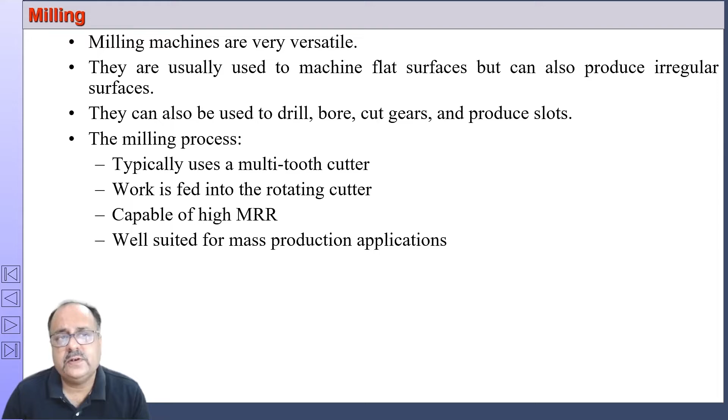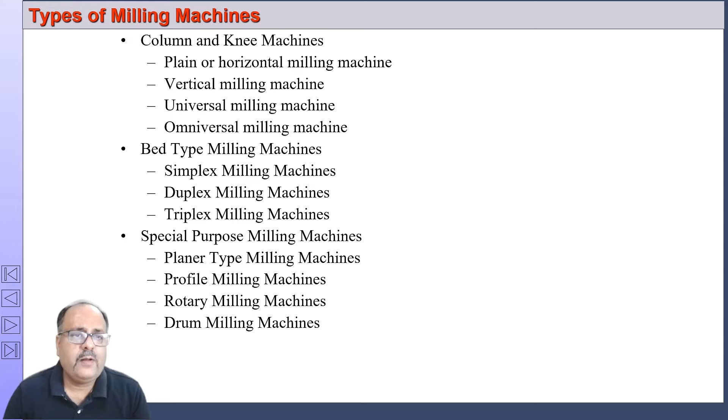So what are the different types of milling machines? They are classified into three basic types: column and knee types, bed types, and special purpose milling machines. Column and knee type milling machines are 4 types. Bed type milling machines can be simplex, duplex, and triplex. Some of the special purpose milling machines which are not that popular are planer milling machines, profile milling machine, rotary milling machine, and drum milling machine. So all these will be discussed.

We'll start with column and knee type milling machines. On the figure on the right hand side is the horizontal column and knee type milling machine. It's a plain milling machine. You can see there is a column and there is a knee, and that's why it's called a column and knee type milling machine.

This knee can move up and down, and there is a saddle on this knee which can move in the crosswise direction, and the table can move in the longitudinal direction. So there are 3 degrees of freedom. This is called a 3-axis milling machine, and this is the spindle.

This spindle holds the arbor, and the arbor rotates carrying the cutter. This is the cutter. So the axis of rotation of the cutter is parallel to the table. That's why it's called a horizontal milling machine.

Whereas here, this also has 3-axis movement. The knee can move up and down, the saddle can move crosswise, and the table can move in longitudinal direction. Here the axis of rotation of the cutter, if this is the cutter, is perpendicular to the table. That's why it is called a vertical milling machine.

It is also a plain milling machine. This is also a plain milling machine. But essentially, when I say plain milling machine, we mean it's a horizontal milling machine.

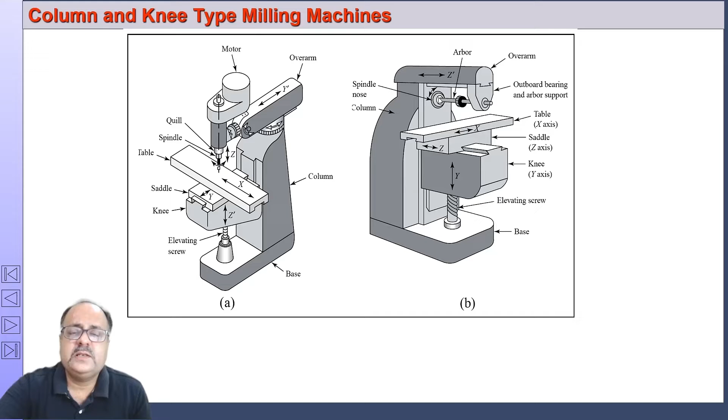So this is a horizontal milling machine. We have two figures in front of you.

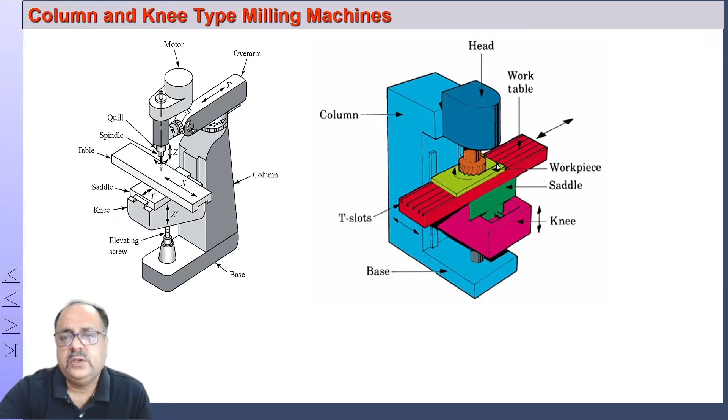This is a vertical milling machine. You can see the cutter rotating. This is a face milling operation going on. The cutter is rotating and a flat surface is being generated.

This is a universal milling machine. You can see apart from this, the knee can move up and down, and this is a saddle here. The saddle can move in crosswise direction, and on top of the saddle there is the table, and this table has a circular base, and it can be rotated about this circular base. You can see the circular base here and it can be fixed at any particular angle.

This is required when you want to take helical cuts, when you want to make helical gears or helical cuts. This type of arrangement is required. This type of arrangement I have shown in our universal milling machine in our lab for making helical gears.

So currently it is cutting gears. You can see this is the dividing head. This is the mandrel which is holding the workpiece, and this is the cutter here which is not visible. It is cutting a helical gear.

So there are 4 degrees of freedom. The universal milling machine has 4 degrees of freedom, or it's called a 4-axis milling machine. It can move up and down, the saddle can move crosswise, the table can move longitudinally, and the table can be swiveled. So 4 degrees of freedom.

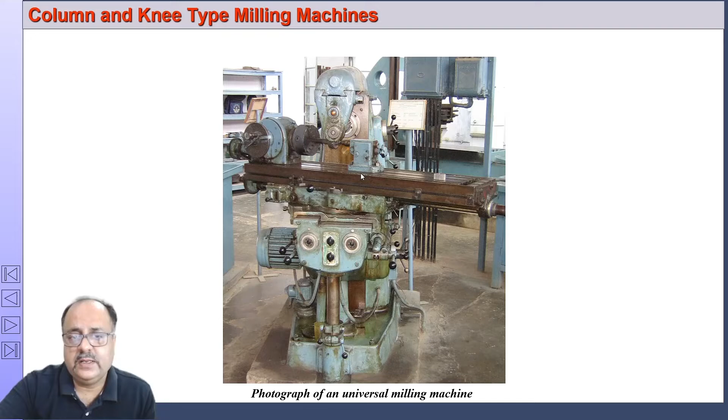And there is another type of milling machine where the table not only can be swiveled like this, it can be tilted also. So it has 5 degrees of freedom. Those types of milling machines are called omniversal milling machines, or 5-axis milling machines.

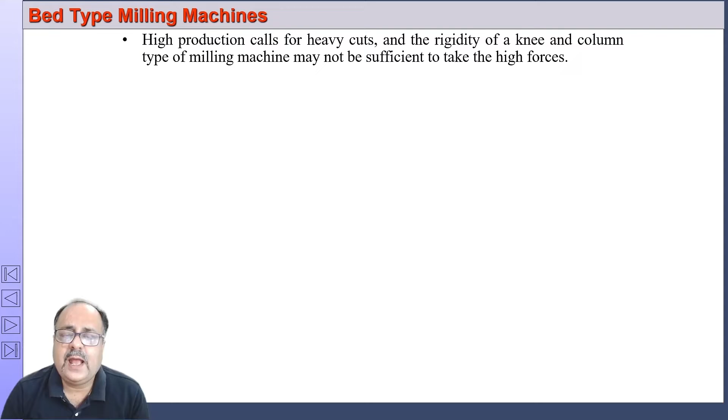Then we have bed type milling machines. Sometimes the work is quite large, not possible to be held in a column and knee type milling machine, and it requires much more rigidity than is available in a column and knee type milling machine. In such cases, we use a bed type milling machine where there is a bed, and on top of the bed the table is mounted. So this gives a much more rigid construction. Depending on the number of spindles, you can have a simplex, duplex, or triplex bed type milling machine.

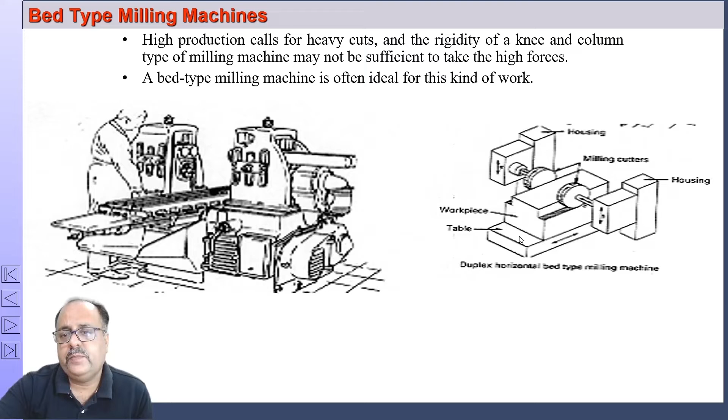So this is a figure of a duplex milling machine. You can see there are 2 spindles cutting the workpiece which is held on a table, which is held on a bed. This is a better figure - this is the table, this is held on a bed, and this is a single spindle.

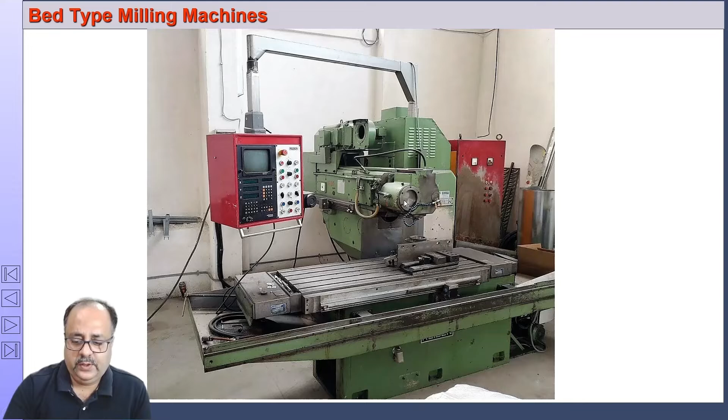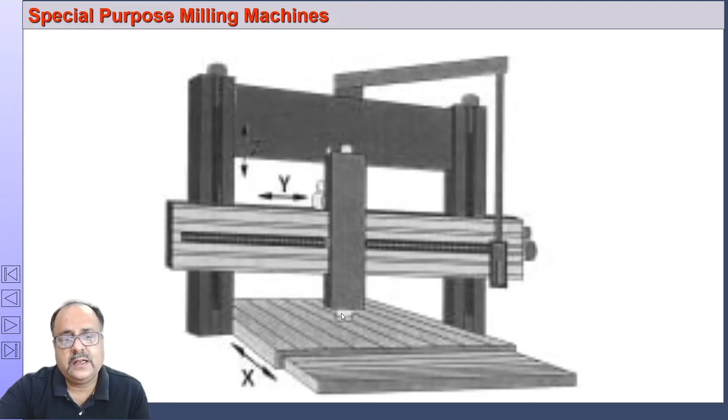And you have some special purpose milling machines like the planer milling machine. Here the table carrying the workpiece reciprocates. The feed is given to the table and the cutter rotates and cuts it. This is a planer type milling machine. The table carrying the workpiece on the bed reciprocates, and this is the tool head which carries the cutter and rotates.

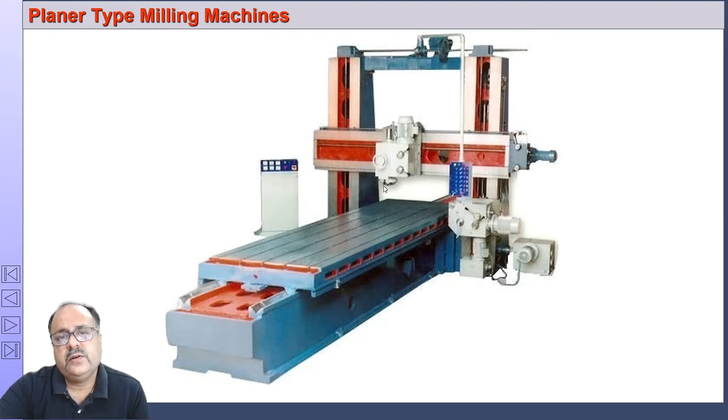So we have the profile milling machine. It's a very interesting milling machine where we have a template or a duplicate of the work which has to be replicated. It may be made of plaster of Paris or any soft material, doesn't matter. What the stylus does is follow the profile of the particular template of the workpiece, and that movement of the stylus over the profile is forwarded to the tool via a hydraulic mechanism. The movement of the tool is replicated based on the movement of the stylus using a hydraulic arrangement, and as a result the template is duplicated on the work. So this type of milling machine is called a profile milling machine.

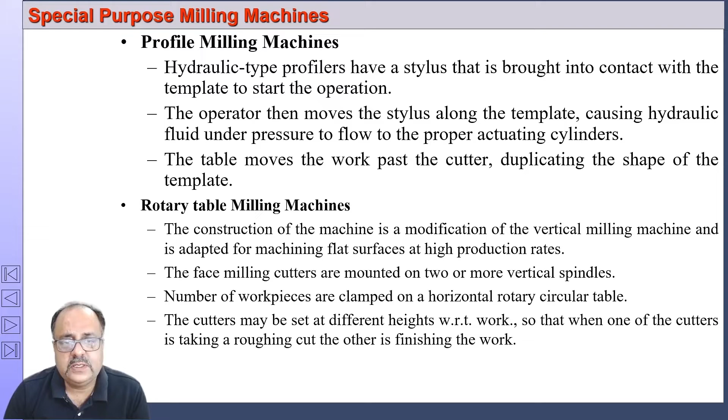Then we have the rotary table milling machine. In a rotary table milling machine, we basically use an attachment called a rotary table. So this enables the milling machine to cut circular surfaces or cylindrical surfaces. This table can be attached to the table of the milling machine, and it can be connected to the lead screw of the table, and automatic feed can be given. The table will be rotating as the cutting takes place. So this enables more workpieces to be machined in a single setup.

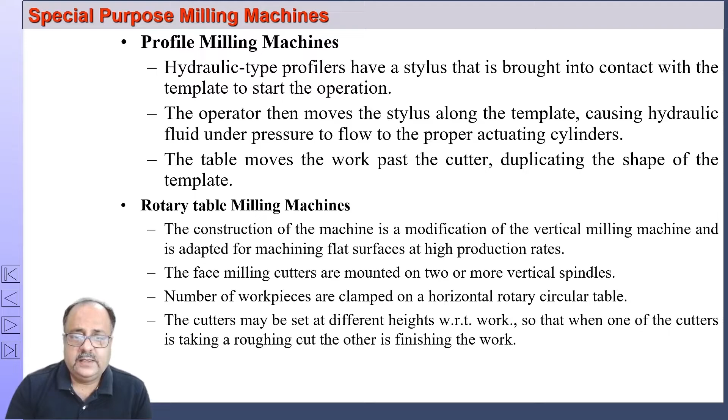And we have the drum milling machine. In a drum milling machine, the axis of rotation of the cutter is in the horizontal plane. So it is rotating in this manner, and there is a drum. On the face of the drum, the workpiece is held, and the face milling cutter is rotating and cutting. So 3-4 cutters can be simultaneously used to achieve higher productivity.

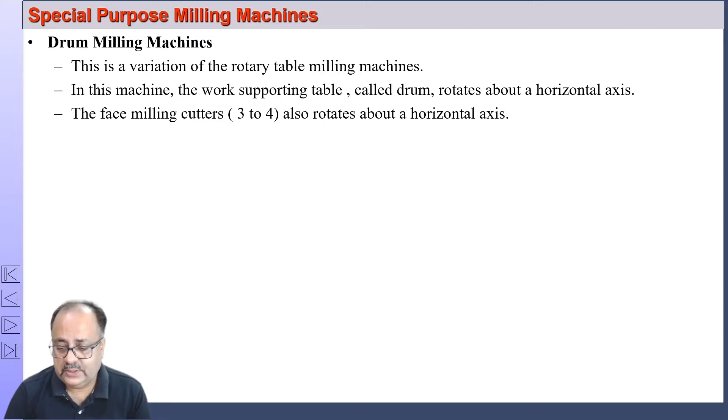These are different types of milling machines that are normally used, but one of the most common are the bed type milling machine used industrially, and the column and knee type milling machine. Sometimes planer milling machines are also used.

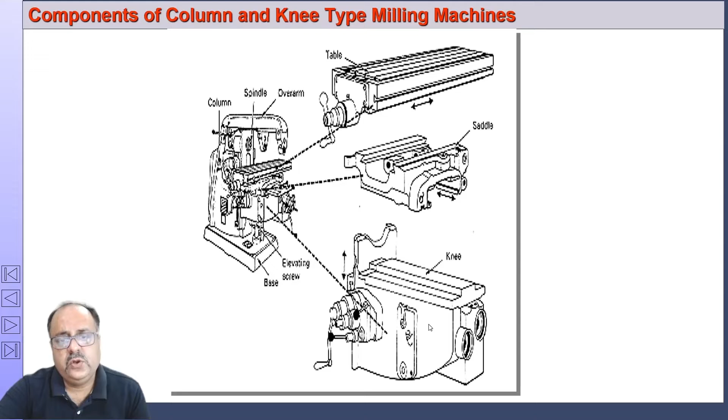Let us have a clear figure here. This is a block diagram of a column and knee type horizontal milling machine, or plain milling machine.

The various components we'll be discussing: here there is a base. The base is normally hollow and made of cast iron, and the other components are mounted on the base. The base acts as a sump for the cutting fluid, and there is a pump and filtration system in the column which will filter the cutting fluid coming back after the cut is taking place, and supply it to the sump in the base. There is a pump system which will pump the cutting fluid in between the tool and the workpiece.

The column is also a hollow casting which is mounted on the rear side of the base, and the mechanism required to drive the spindle is mounted inside the column, and sometimes the controls required are also mounted on the outside of the column structure. On the top side, or the front side of the column, it is accurately machined, on which the knee can move up and down. On the top inner side, there is a circular hole through which the spindle is mounted in the column.

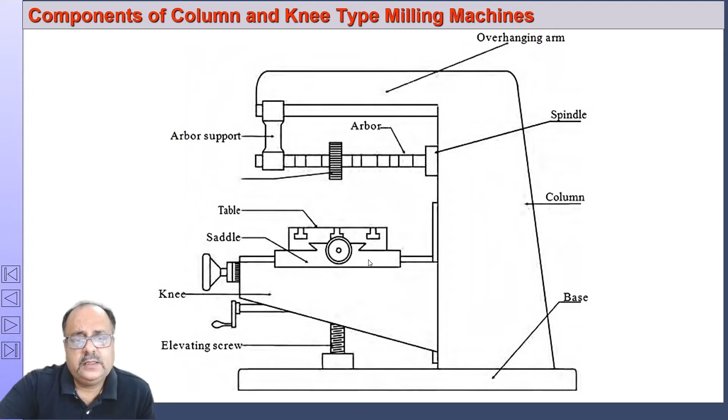The knee is mounted on the front face of the column on an elevating screw, and the knee can move up and down - the z-axis movement is given to the knee. On top of the knee it's accurately machined and forms ways for the saddle. The saddle is mounted on top of the knee, and this saddle can move in z-axis in this manner. So the axis name can vary - it can be z, it can be y. Here the saddle can move up and down crosswise in this direction, and the table can move in this direction.

So these are the major components of a milling machine. The table has T-slots on which the workpiece or work holding devices can be mounted, or directly you can use T-bolts and clamps for holding the workpieces, or you can use vices or other compound angle plates or V-blocks to hold the workpieces, or workpieces can be held using indexing or dividing head. These are the various ways you can hold the workpieces.

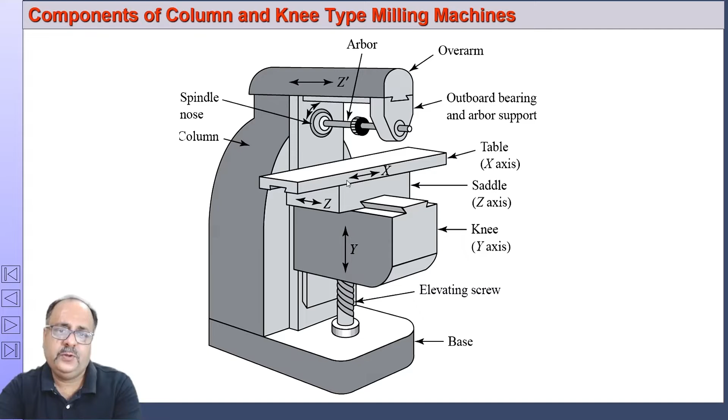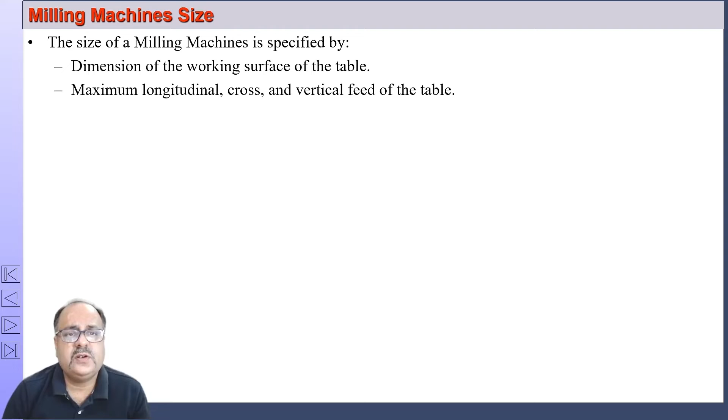So how do you specify the milling machine size? The size of the milling machine is specified by the dimension of the work surface and the maximum longitudinal feed, cross feed, vertical feed, apart from the ranges of spindle speeds, ranges of feeds, and the power that is available, and the taper of the spindle nose is also specified, and the gross weight.

So this is how we specify a milling machine. These are the common parameters which have to be specified while specifying a milling machine.

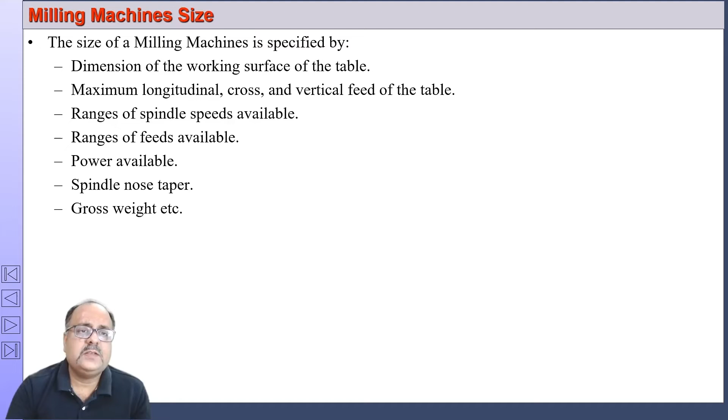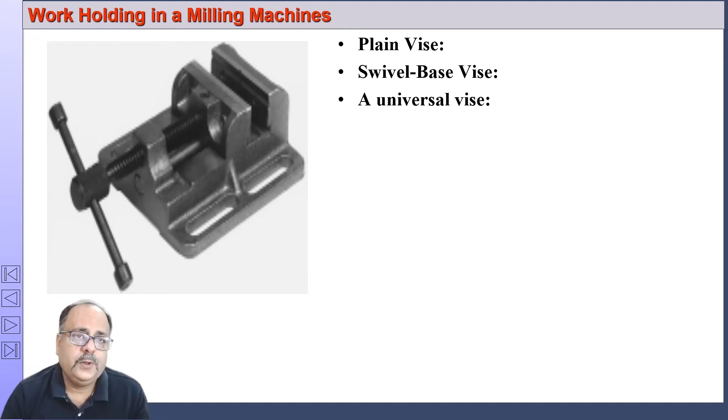The angle plates are used for right angle workpieces. Those type of workpieces can be held using the angle plates along with clamps and bolts.

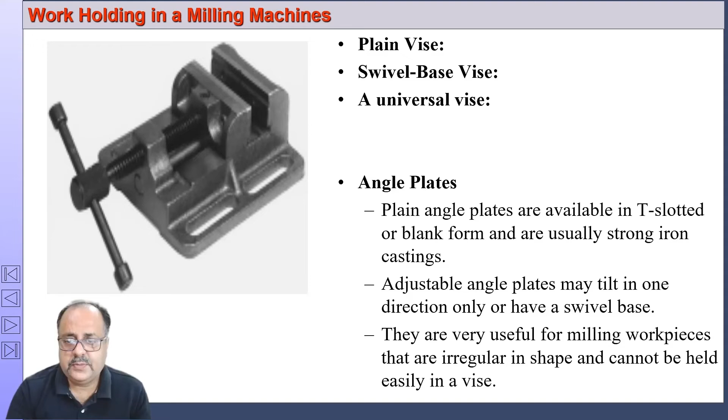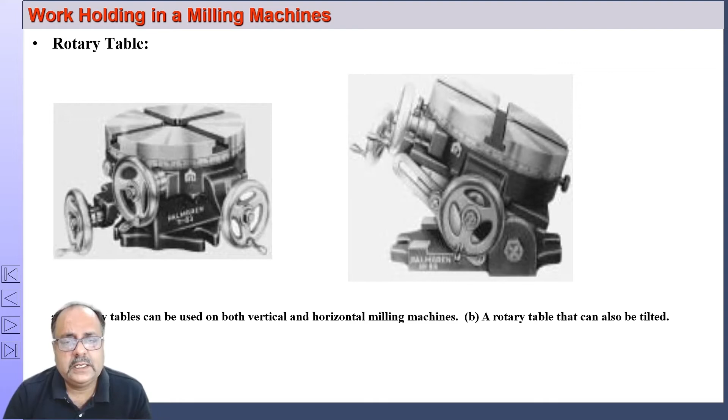A rotary table is one of the important attachments of a milling machine. This rotary table can be rotated, and you can see it is tilted also. This particular machine not only can be rotated, it can be tilted. So try to understand the complexity of the workpiece that can be done using this type of attachment. The rotary table can be attached to the table feeding screw so automatic feed can be given, and it can be rotated during the cutting process. You can see it is graduated here.

It is fitted on the table of the milling machine in the T slots, using T bolts and nuts.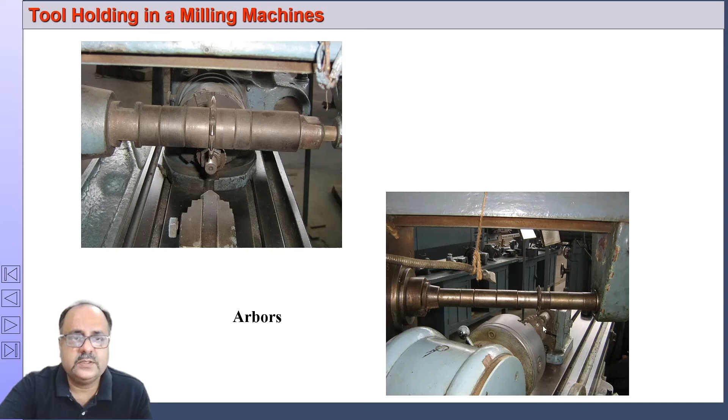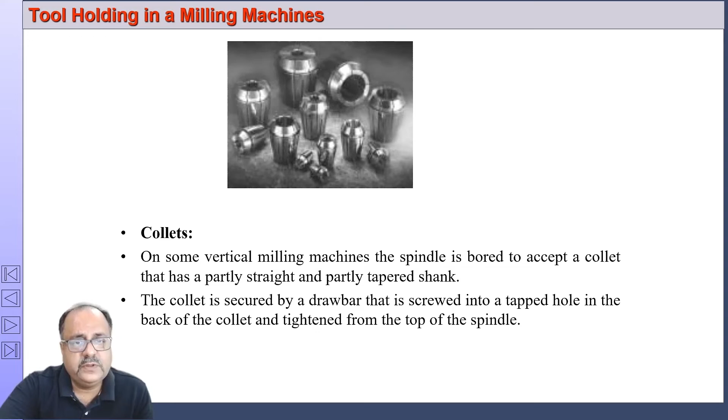How do you hold the tool? You can use collets, particularly useful for holding end milling cutters or tapered shank milling cutters. Collets can be fitted to the spindle, and to this collet you can fit the tapered shank of the cutter for end milling cutters. You can directly bolt it, or fit it in the arbor. Face milling cutters can be directly bolted on the nose of the spindle. Small cutters have threaded holes at the center and can be screwed on to the nose of the arbor.

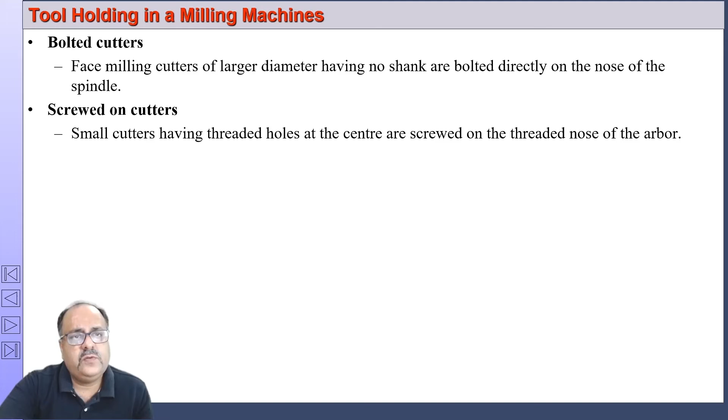So with this we move on to the different types of attachments. One of the most important attachments, which most milling machines have or you should buy along with the milling machine, is the universal dividing head.

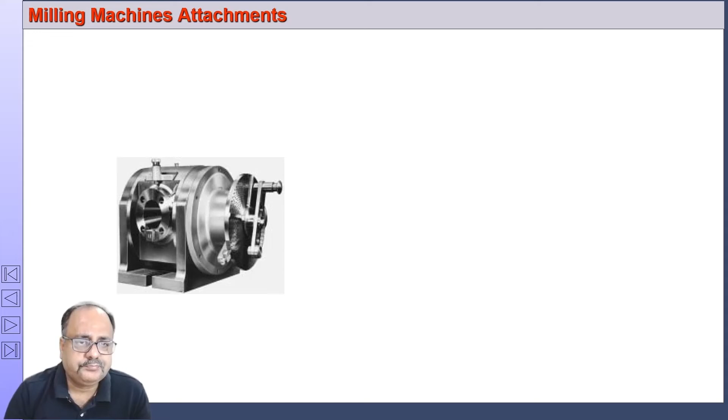Now what is a universal dividing head? We will be discussing this in detail in one of the following lectures. The dividing head is basically used to divide the workpiece into equal number of divisions, particularly required during gear cutting and other similar processes. We will discuss the dividing head in subsequent lectures in detail when we discuss milling indexing.

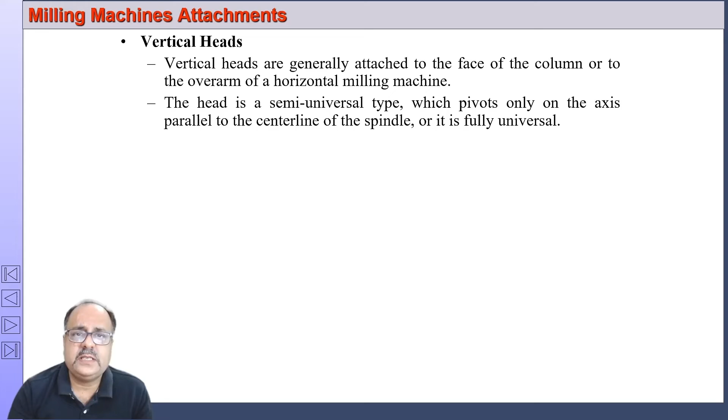Sometimes you have a horizontal milling machine and want to carry out vertical milling operations. For that you need to convert the movement of the spindle, which is rotating about a horizontal axis, to rotating about a vertical axis. A vertical head attachment converts the horizontal rotation of the spindle into vertical rotation. This attachment is attached to the face of the column or to the overarm of the horizontal milling machine.

Slotting attachment: sometimes you want to cut slots. Of course you can cut slots by different processes in a milling machine, but suppose you want to cut a slot using a slotting attachment by reciprocating movement. So the rotary movement of the spindle has to be converted into reciprocating movement of the cutting tool, which is possible using the slotting attachment.

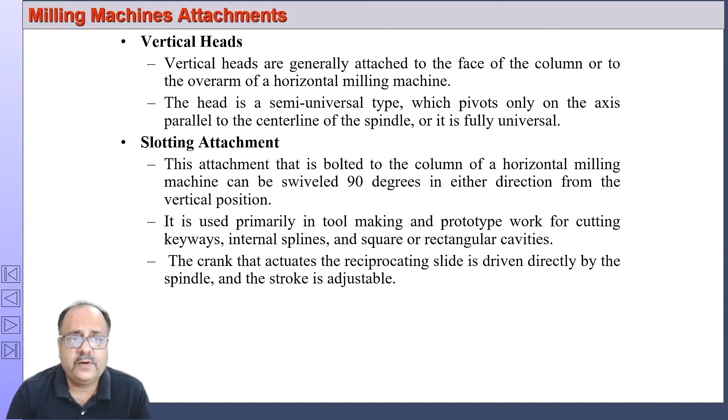Then we have rack milling attachments, used for cutting spur racks and helical racks. It is also attached to the face of the column.

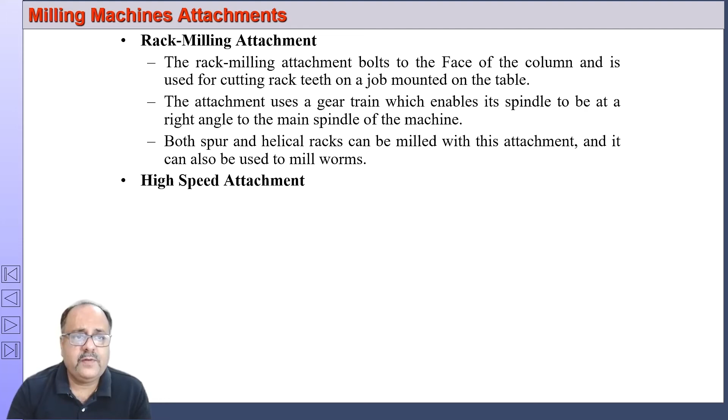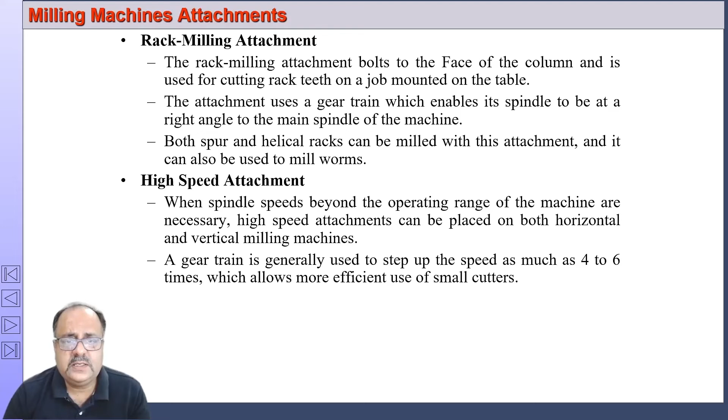And you have high speed attachments. Sometimes you want to operate the machine at a speed higher than what is available, so you attach a high speed gearbox to the face of the column, and it increases the speed of the spindle by 4 to 6 times.

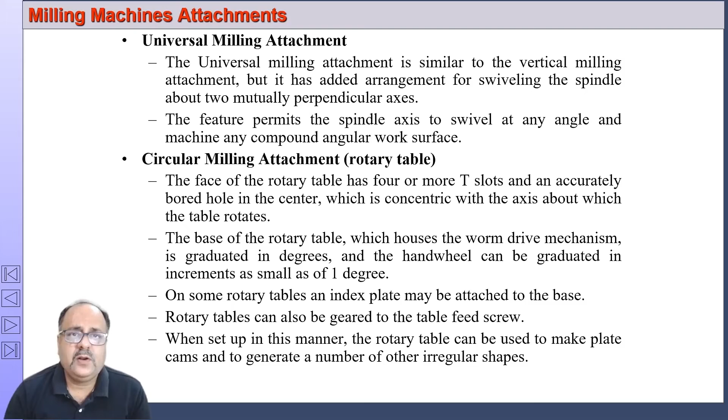Then you have the universal milling attachment, a very important attachment. If you have a horizontal milling machine and want to convert it into a vertical milling machine, just like the vertical head, it can be converted, and not only converted into a vertical head, it can be swiveled and tilted also. That is called the universal milling attachment. And the circular milling attachment is the circular table we already discussed.

With this, we move on to milling cutters. One of the reasons why the milling machine is so versatile is because we have different types of milling cutters.

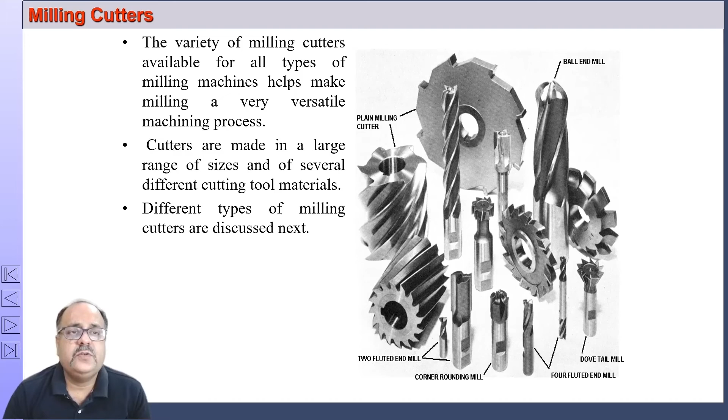The entire set of milling cutters, I'll be dividing it into two parts. First, I will be discussing those type of milling cutters which are used in horizontal milling machine, and then we'll be discussing those used in vertical milling machine. So let's discuss the cutters used in horizontal milling machine.

The first cutter that I'll be discussing is the plain milling cutter. One of the most important cutters is the plain milling cutter. You can see this plain milling cutter has cutting edges on the periphery, and it is rotated, and it generates a surface which is a flat surface parallel to the axis of rotation of the cutter.

So it has cutting edges on the periphery, so the helix angle may vary. You can see this is a standard helix angle, this is a high helix angle, this is also a high helix angle. So these are the flutes, the gap between the teeth. This type of cutters are used to generate flat surfaces parallel to the axis of rotation of the cutter, and it has cutting edges only on the periphery.

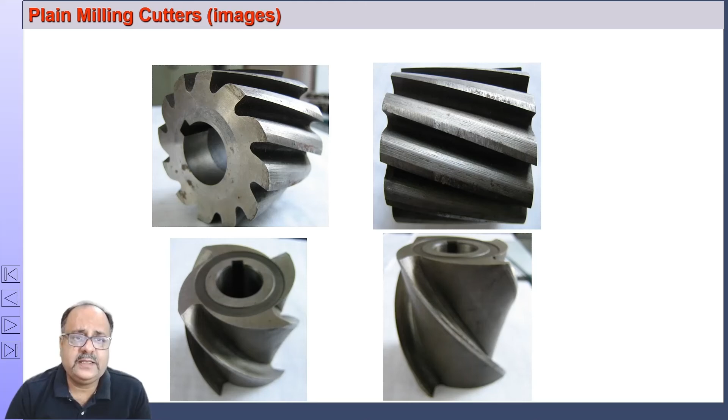Then we have side milling cutters. The side milling cutters are this type. It has cutting edges on the periphery and possibly on both sides. If it has cutting edges on both sides, we call it a side milling cutter, and if it has cutting edges on one side and the periphery, we call it a half side milling cutter.

What type of operations can be done by a side milling cutter? You can cut slots and you can cut shoulders. I'll show you while discussing the process the application of side milling cutters and half side milling cutters.

Then we have stagger tooth side milling cutter, where alternate teeth are in opposite helix. Why this type of construction? To increase the gap between the corresponding teeth so that you can take a deep cut. This is a stagger tooth side milling cutter.

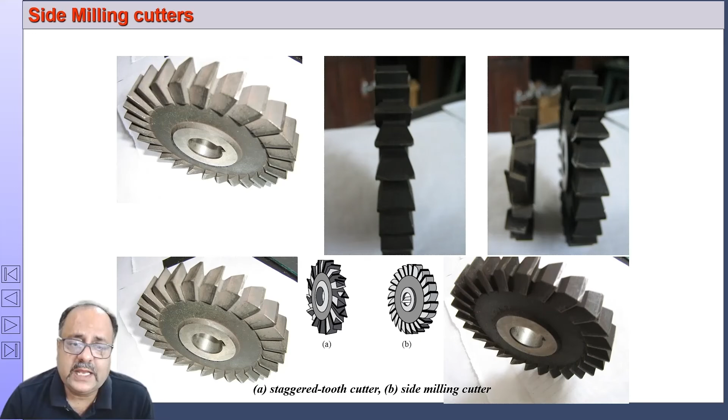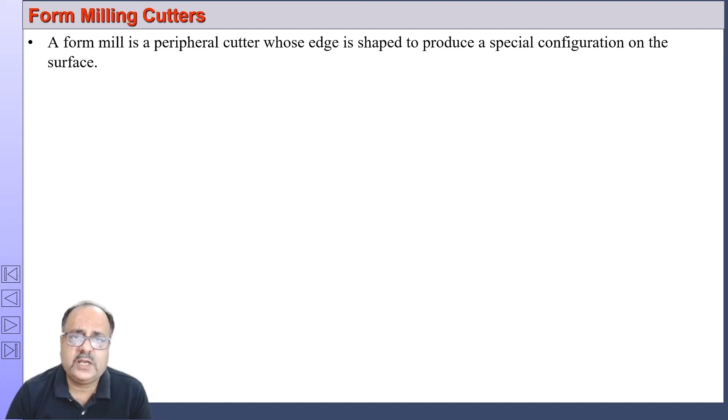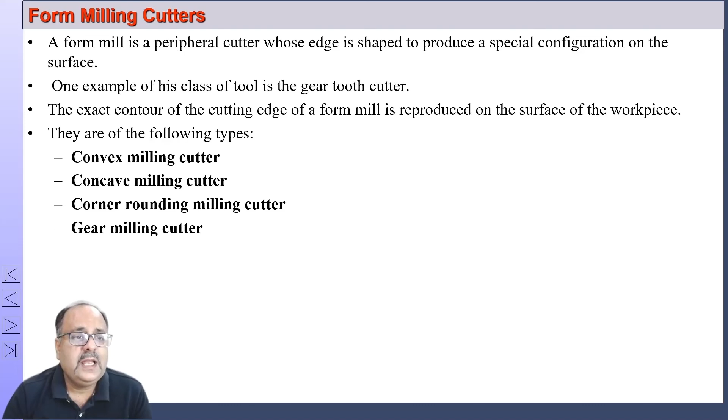Then we have form milling cutters. Irrespective of what machine tool, form cutters are those cutters where the shape of the tool is reproduced on the workpiece. Sometimes we require the shape of the tool to be reproduced on the workpiece. In such cases, we use form milling, and for that we have different types of form milling cutters.

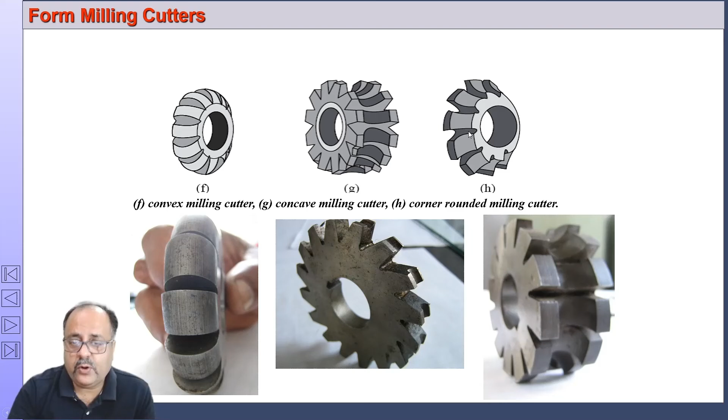Another very important form milling cutter is the gear cutter. This is an involute teeth gear cutter.

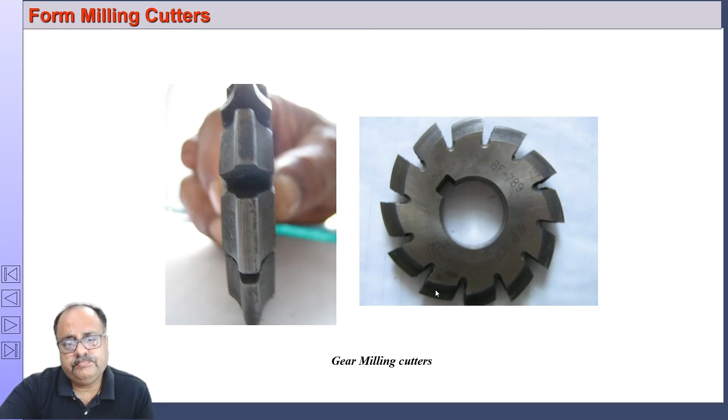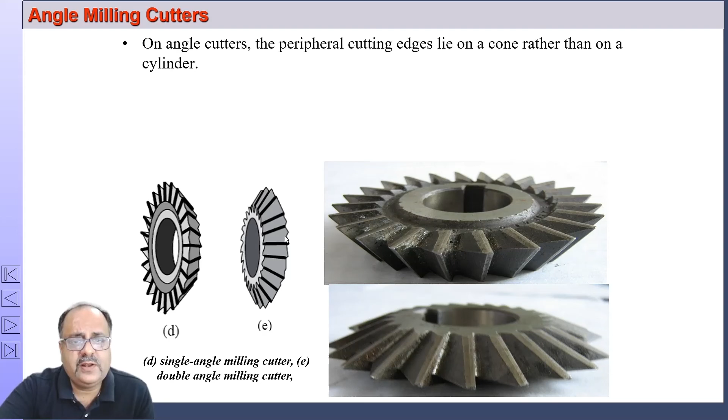Then we have angle milling cutters. For cutting angular slots, one-sided angle or double-sided angle slots, we use angle milling cutters. These are available in various included angles and various diameters. And we have slitting saws.

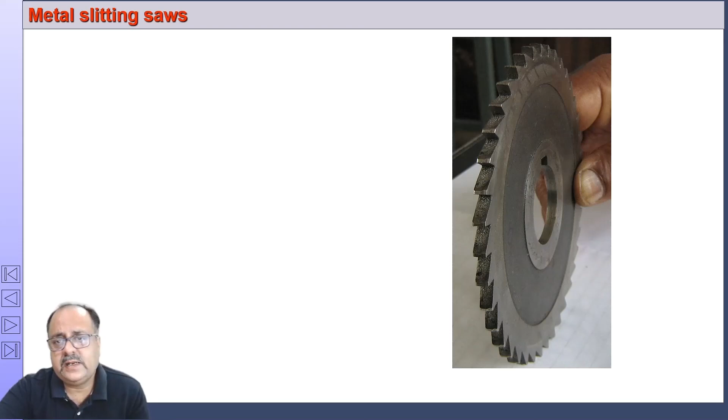Slitting saws are used for cutting slots and for parting operations - that means if you want to divide the workpiece into parts or cut it out, use slitting saws. They are basically plain milling cutters having cutting edges on the periphery, but these are very thin.

And we have end milling cutters. Till now, the milling cutters that we have discussed are all used in horizontal milling machine. Now onwards, the milling cutters that we will be discussing are used in vertical milling machine.

End milling cutters are tapered shank or straight shank. These are straight shank end milling cutters. They have cutting edges on the periphery as well as on the face. For applications like cutting slots, cutting pockets, two-dimensional profile cutting, and three-dimensional profile cutting, end milling cutters are frequently used. There are various types.

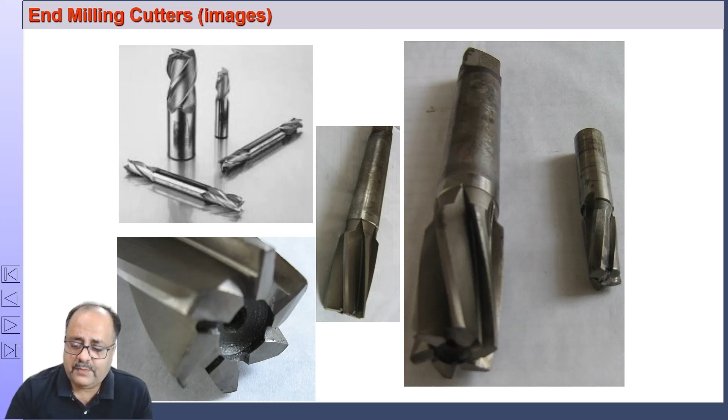So with this we come to the end of this part of the lecture. In the next part, we'll be discussing the nomenclature of a plain milling cutter, and we'll be solving various problems associated with milling. Thank you for listening to this.